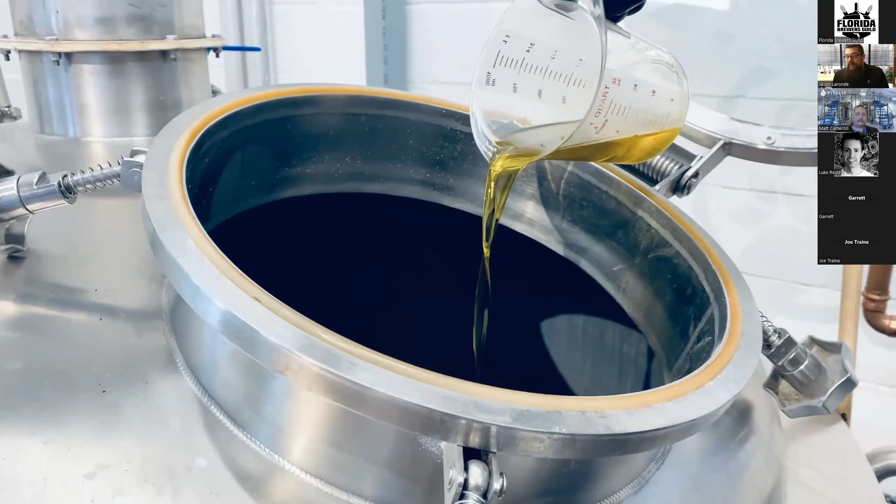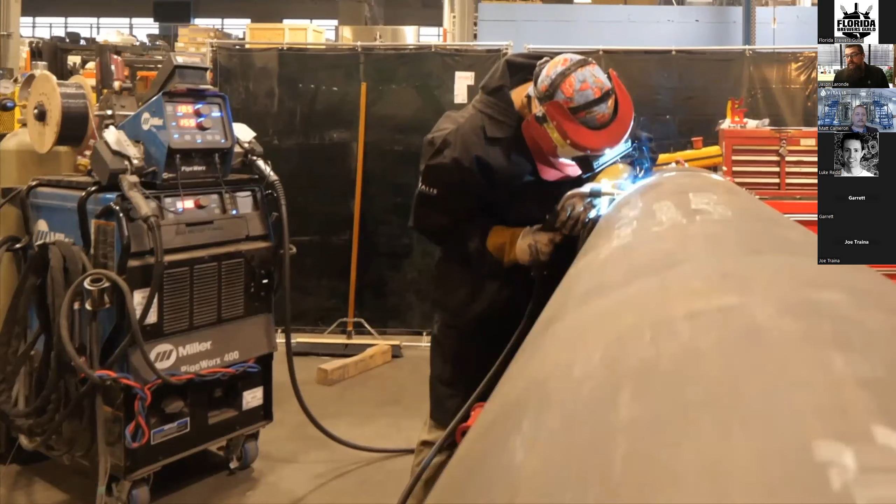So at Vitalis, we provide clean tech solutions for some really cool markets. Our experience with the beer industry actually goes back several years. It started with helping one of the world's largest hops extractors create specialty CO2 hops concentrates using our equipment. We are a vertically integrated original equipment manufacturer of CO2-based technologies with in-house R&D, design, engineering, production, and support. And our mission is to help producers thrive while becoming more resilient and future-proof.

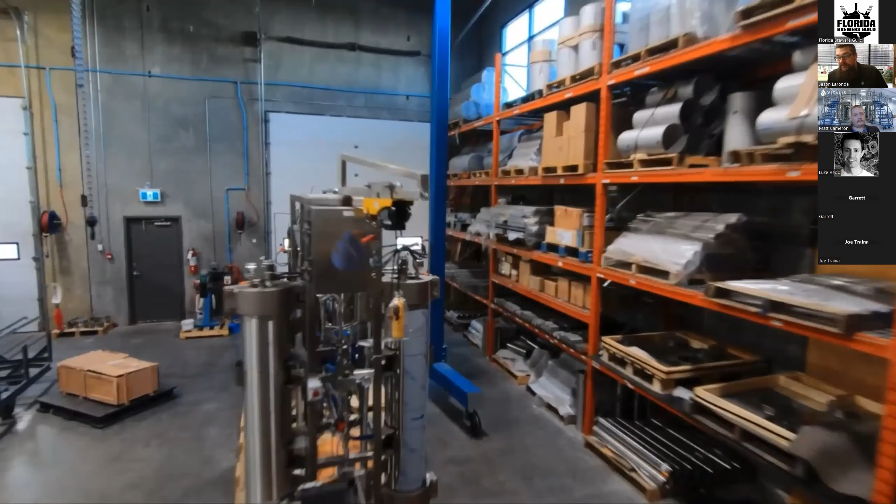We do that by utilizing the unique properties of carbon dioxide in a number of different ways, like extracting or refining natural ingredients from biomass, or employing CO2 as a heat transfer fluid and a natural refrigerant, or recovering and distilling CO2 for repeated use, which is what we're going to talk to you all about today. We have over 150 installations on 5 continents, and our CO2 expertise is recognized worldwide.

As Jason mentioned, CO2 is a big part of our day-to-day in the brewery, and it's a key part of the operation. Probably something that we all just couldn't live without. So, when we're looking at usage in craft breweries, whether you're packaging, blanketing, purging, we all need CO2 in some shape or form. But we also know that unfortunately, CO2 is not free these days.

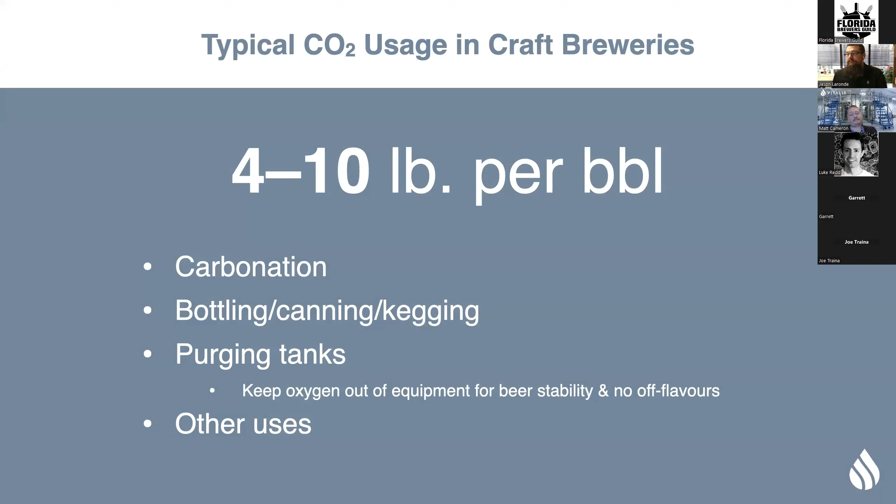So CO2 prices can vary dramatically from region to region, fluctuating with factors such as shipping distances or fuel prices, transportation shortages, and supply disruptions. And sometimes CO2 just isn't available at any price. CO2 prices have actually increased by 58.2% over the last 10 years, outstripping inflation by more than 2.5 times. So these are costs that you can't entirely pass on to your customer, and you need to absorb them as an increasing cost of doing business. We're curious, if you want to drop into the chat, tell us what your current rate is for buying CO2 by the pound.

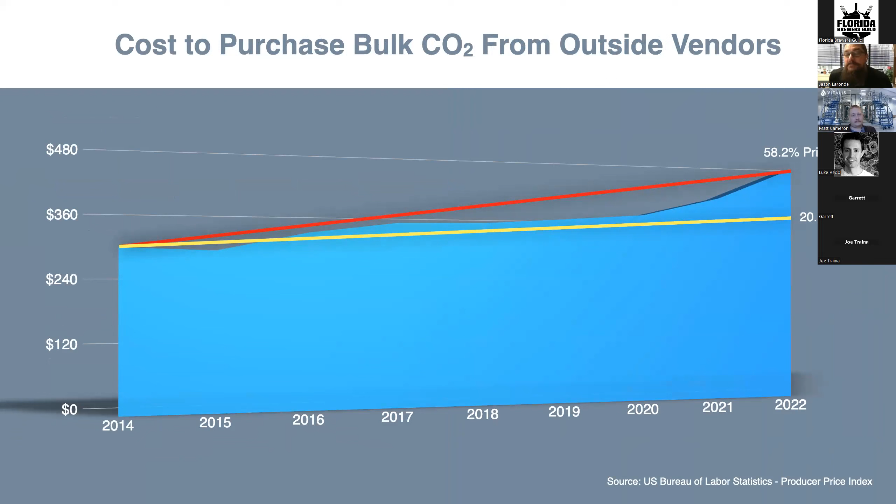Yeah, on top of the cost of CO2, supply origins is something that's nice to know in any food and beverage application where the product that you're making is ultimately being ingested by your customer. It's always really nice to know where that's coming from and how it's being produced, so that your customers can have peace of mind as to what they're putting in their body.

So typically, the CO2 you purchase in bulk from your supplier will be derived from things like oil and gas wells, possibly ammonia production for fertilizer, or ethanol production. So ethanol production, okay. Oil and gas wells, maybe not so much.

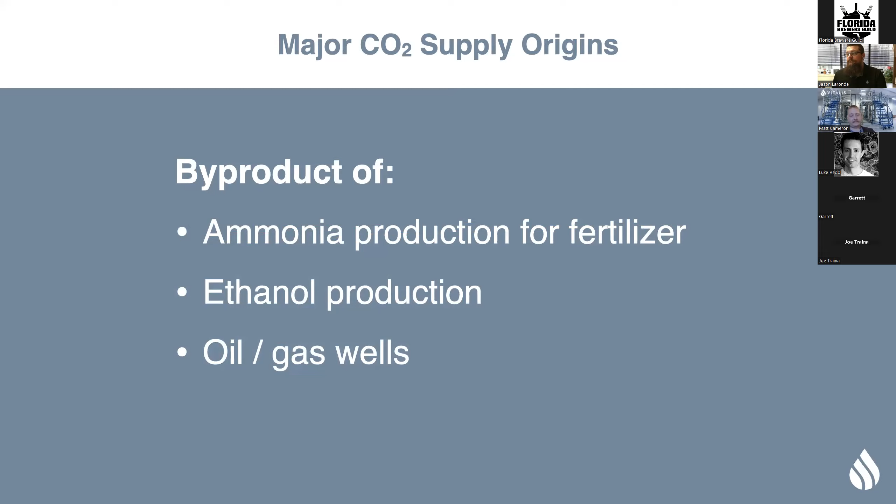As we've all seen, and we're probably all very familiar with, the production of CO2 from the various sources we just discussed can have some real world negative impacts. Whether it's plant maintenance or plants shutting down entirely, as we've seen in New Zealand. These can all result in supply chain disruptions, higher prices, or possibly even a nice little force majeure letter from your supplier, which is not what we really like to see.

One other interesting looming implication is this 45Q tax credit. I'm curious if you guys put in the chat how many of you are familiar with this, but it has the potential to change the landscape quite significantly with CO2 suppliers basically being incentivized to sequester their carbon as opposed to their normal channels of selling it to their customers. So I'd be interested to see how many people are familiar with that and what you guys have heard about the 45Q.

So basically, for all these reasons, we've all been frantically looking at ways that we can reduce or optimize our consumption in the brewery day to day, right? Spunding, maybe chaining your tank blowdowns together, scouring the brewery for potential leaks, just to make sure that you're capitalizing on every kilo or pound of CO2 that you're using. And there's also nitrogen for purging. I know this is a pretty familiar process for a lot of breweries that are looking to knock down their CO2 usage.

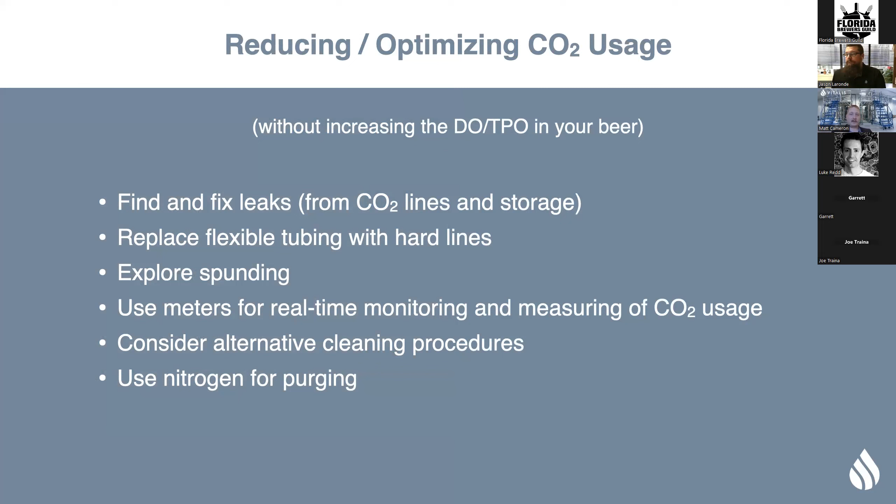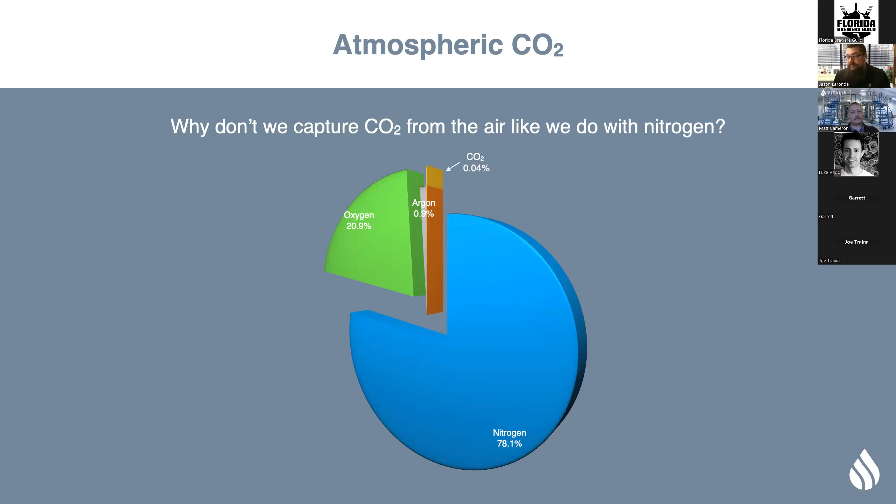There's, of course, the oxygen component of the atmosphere, which is what we need to live. Then there's argon, and then there's CO2. And CO2 makes up just 0.04% of the atmosphere. So it just makes economical capture impractical. Yeah, as Jason mentioned, there's not a lot to go around in the air.

So when we look at CO2 produced from fermentation, the numbers are much more favorable. As we all know, there's variables that affect overall production, higher alcohol content, how much you can capture on the front and back end, depending on what system you might be looking at. But either way, it has the potential to really be the great equalizer. The ratio of produced CO2 to consumed CO2 can be as high as 3-to-1 in any given brewery. So I'll let Jason maybe dive into some of the math on this.

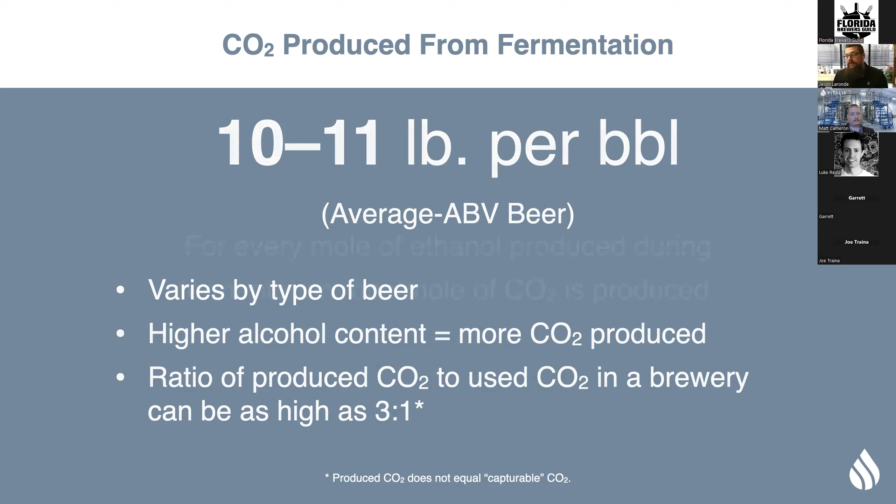Yeah, so CO2 capture is not a new technology, but often equipment is marketed as to how many barrels a piece of equipment might be appropriate for. So that's how you size equipment. But in actuality, it's more important for you to understand how much CO2 your brewery is actually producing, so that you can select the most appropriate piece of equipment to capture as much CO2 without overbuying or underbuying the capture equipment.

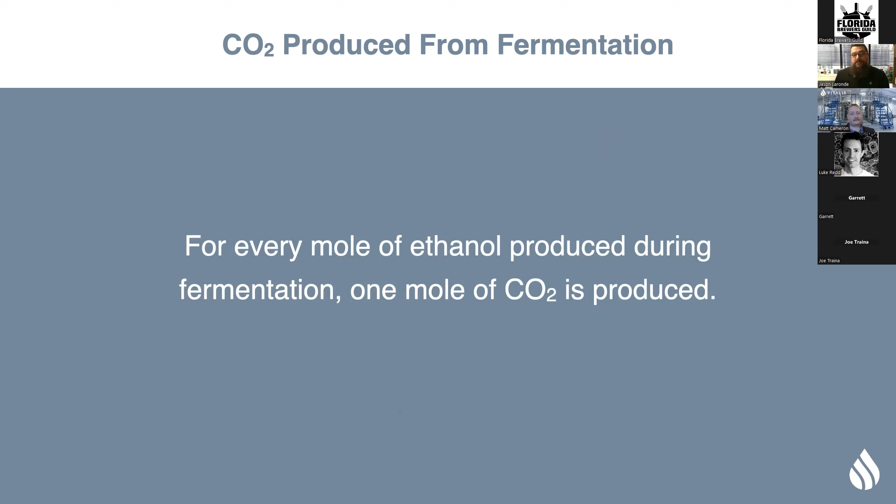So for every mole of ethanol, this is going to get really nerdy into the science, but mole being a unit of measure. For every mole of ethanol produced during fermentation, 1 mole of CO2 is produced. And so we can actually use this formula, which allows us to calculate how much CO2 is actually being produced by each individual brewery. We look at the volume of beer that a brewery is producing per year. We look at an overall ABV of the beer or the beers that brewery is producing. We multiply that by the density of ethanol, and then multiply that by the molar mass of CO2, and divide all of that by the molar mass of ethanol.

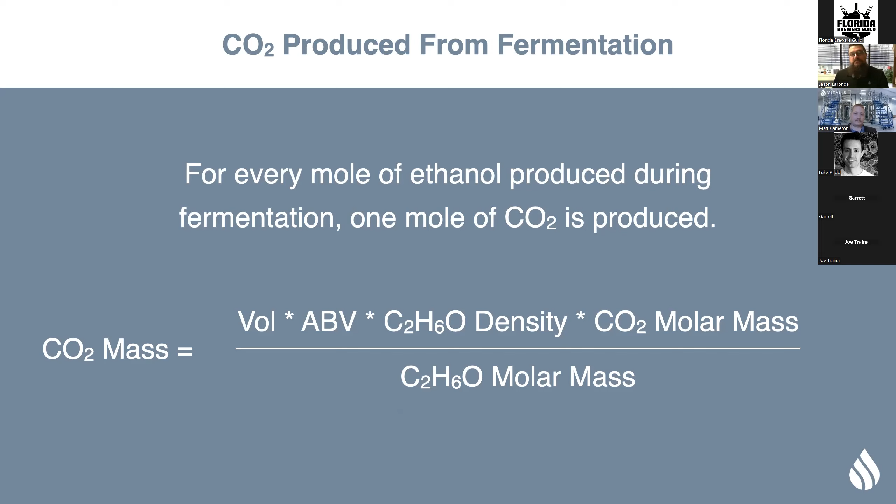And we can actually figure out how many kilos, how many pounds of CO2 a brewery will produce every single year. And so if we then plug that into a couple of case study models, we're able to actually show very definitively about how much CO2 you realistically could generate. And then when we compare that against what you pay for CO2, how much CO2 your brewery uses every year, we're able to actually figure out what an ROI model might look like when deploying CO2 capture equipment into your

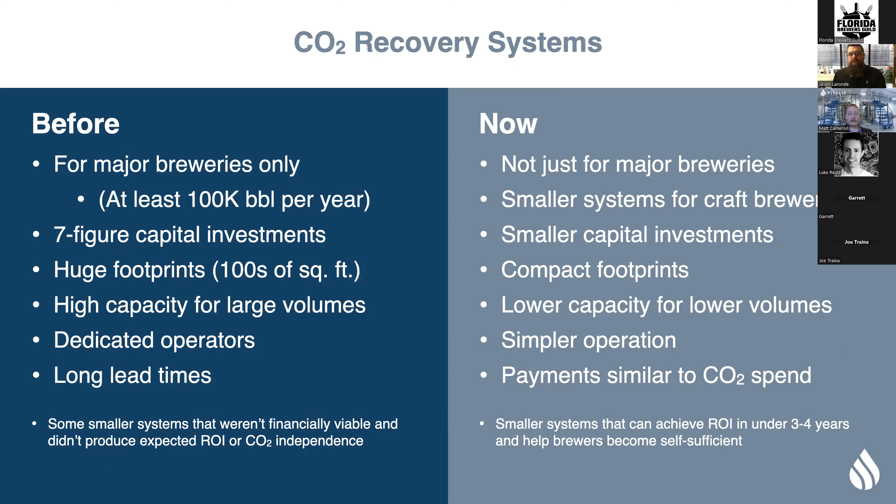So we've been able to develop this system to make it accessible for smaller breweries, right? Lower capacity throughput on the system. It doesn't have to churn at 1,000 kilograms per hour, because it's not realistic for the majority of the market. So it's really refreshing to see some manufacturers out there putting a lot of work and effort into making this kind of a potential reality for a lot of these breweries out there.

I mean, as we all know, the large percentage of the market is this 5,000 to 25,000 barrels per year. And so it's been really great to see this accessible for the craft brewers. As with anything, when you're looking to purchase equipment, or you're researching and understanding new technology, there's always variables to consider, because it's certainly not a one size fits all solution, right?

So, one thing you've got to consider is the volume of beer that you're producing and the amount of CO2 that you're using. As Jason showed in those case studies, it's a very different scenario based on, do you make RTDs? Is my CO2 consumption a lot higher than your average brewery? So it's important to look at the number side of things. How much beer am I making? How much CO2 am I using? And how much CO2 will I produce from fermentation? All those things go in that equation to work towards, does this make sense for me to implement, right?

Sometimes certain breweries will have really great rates with their suppliers for CO2. So, if you're paying 10 cents a pound for whatever reason, let me know if you are, because I'd like to talk to your sales guy. It might not have that same ROI calculation that Jason was showing. So all those variables are really important to look at. And then at the end of the day, that all equates to what ROI might be.

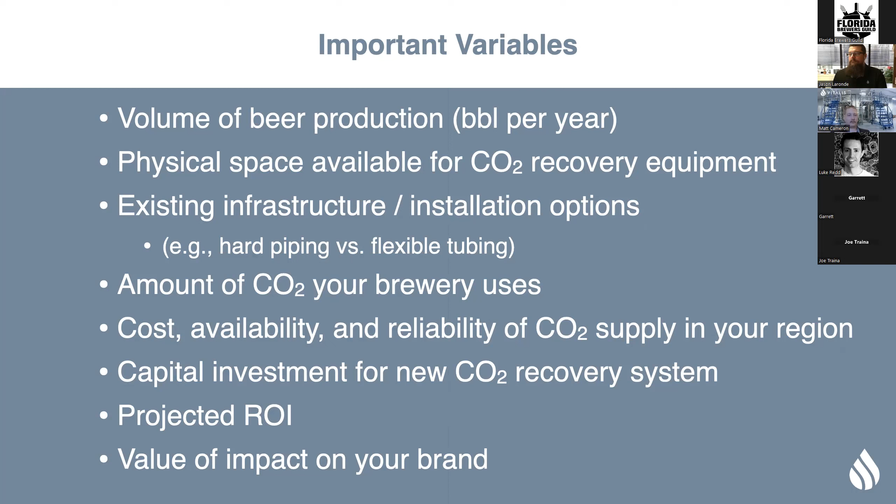But outside of the financial thing, it's also important to consider what the optics of that are on your brand, right? What the value of the impact is on your brand. It's something that everyone's talking more and more about, right? Sustainability, clean technology, and there seems to be a lot of respect in the market for breweries that take a step forward as innovators and look at new technology, and that pays dividends, because your loyal followers and customers are going to respect you for that, and as a result, they'll probably come into your taprooms more or buy more of your beer. So there's a lot to consider when looking at these systems.

Now, that's just considering the idea of CO2 recovery and how that will impact the brewery, but there's also factors to consider when you actually begin shopping, right? If you've decided this technology is the right move for your brewery, there's some more intimate key points to keep in mind while you're doing the research, right? So, what is the capacity of the system?

This is a really important one that we always look at: if you're brewing 10,000 barrels a year and you've found the system that fits you just right, is that going to be obsolete in 2 years because all of a sudden you've moved up to 15,000 or maybe 20,000 barrels? Maybe you had a really great couple of years. You put in a new row of fermenters or two, and all of a sudden your annual volume has doubled. Is that system going to be able to keep up with that capacity of beer?

Because it's not great to spend 100,000 or 200,000 on a system and then 2 years go by and all of a sudden it's not really pulling its weight anymore. So the throughput of the system compared to your current volume, but also your projected volume, is something very important to consider.

Maintenance and consumables, something very easy to overlook. I've got the system, it's operating, I love it, but what filters do I need to replace? Are those filters maybe a proprietary product from the manufacturer? That might equate to not being able to get them when you need them, right? And so now we go back to being limited by supply chain. So, I would say keep a close eye on what those consumables look like and what preventative maintenance looks like, so that you can keep the system on and running all the time so it can continue to do what it's designed to do.

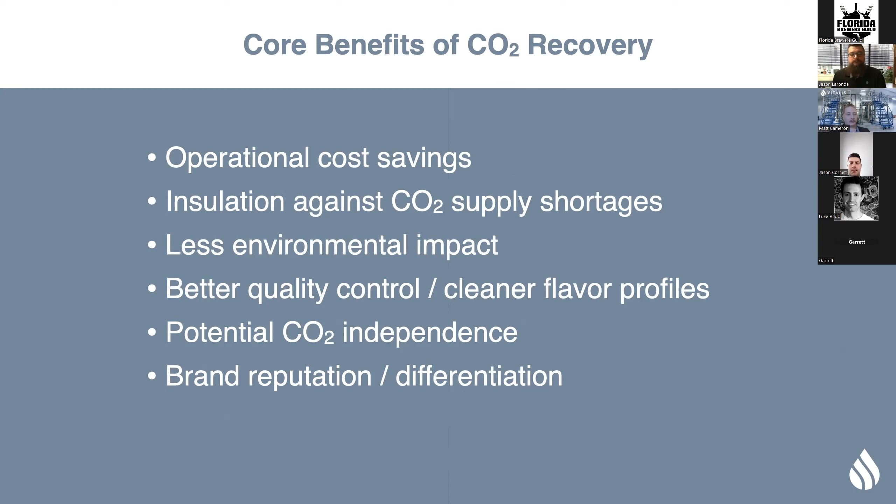There always needs to be social proof for people to adopt new technology, maybe step outside of the comfort zone. It's not easy being the pioneers of new things that not a lot of people are doing. So it has been going on for a long time, right? Big beer's been doing it, but then craft brewers start to get into it. We've got Alaska Brewing here that did this more out of necessity due to their geographical location. When you're living in Alaska and trucking your CO2 all that way and trucking your beer around, it really starts to add up. So these guys are a little bit ahead of the curve. 25 years ago, they jumped down the rabbit hole.

But thanks to pioneers like Alaska, this technology is becoming more accessible, but it's also spreading awareness because people can see this. The proof is in the pudding, right? The breweries are doing it. They're seeing the impacts it has on their business model, and people are following suit.

So how does it work? First of all, what we start with is the CO2 from your fermentation process, and in many cases also the CO2 recaptured from blanket gas and purging. We want to capture as much CO2 in your system and recycle it as we can. We then either use a small amount of capacity from the brewery's existing glycol system, or we can couple it with one of Vitalis's R744 CO2-based Coolshift heat pumps, if this is part of a new brewery or maybe a broader retrofit. And the CO2 recovery system encompasses these processes here.

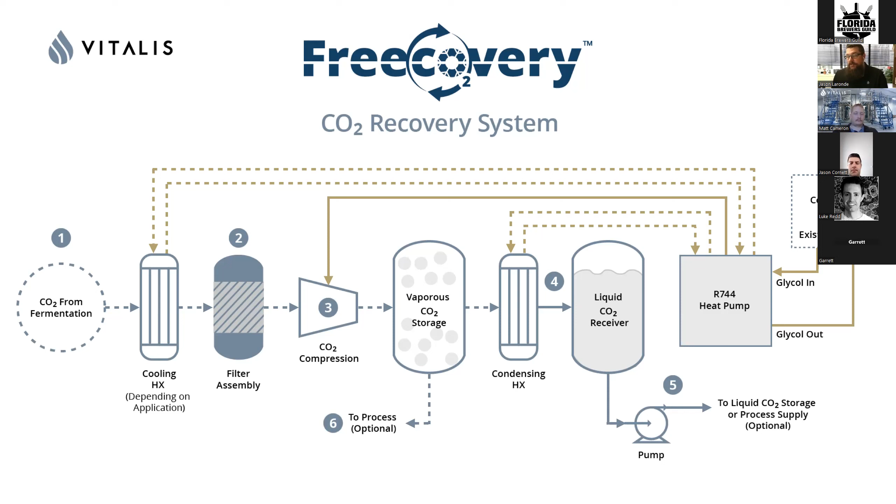There's no sense using all the additional energy to condense the CO2 to a liquid, only to then have to boil it back to a gas for processes like purging and blanket gas. This way we can plumb gas processes with gas and liquid to liquid processes with no wasted energy to convert phases twice unnecessarily.

This equipment can be installed directly in your cellar, possibly in a mechanical room nearby to the cellar, or even outdoors with an enclosure if the space just isn't there inside. If there's an adjacent wall close to the cellar, but it makes sense for this unit to be outside, then that's also a possibility as well. There could even be a scenario where it goes up on a mezzanine in the cellar in case that's how your particular brewery is laid out.

Speaking to the purity of the system, most of these systems will get a purity of around 99.99 plus. One key thing is the performance on dissolved oxygen. Yes, it's pure CO2 analytically, but that can be broken down in a myriad of ways, right? And one thing that I've always heard in the brewing industry, I've probably installed and commissioned 500 brew houses over the last 20 years, DO is always kind of creeping around and being a problem. So one of the things that we've focused on is a pure, clean CO2 with low dissolved oxygen.

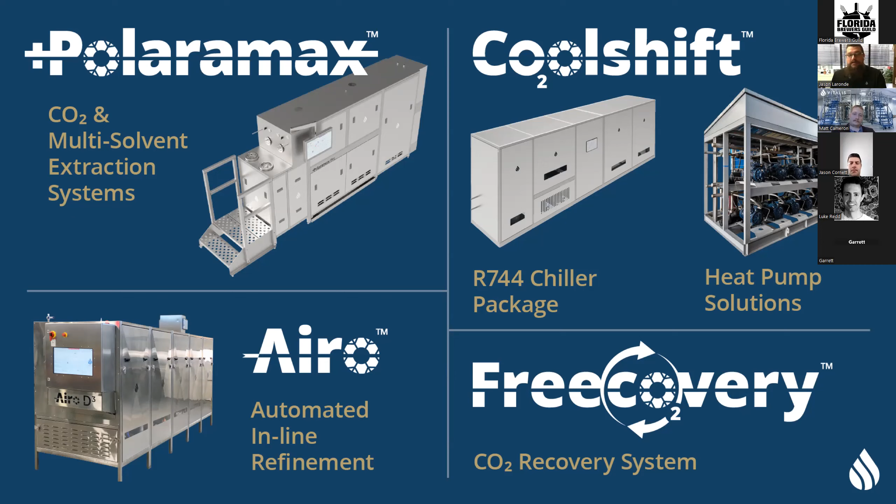So with that, I'll close with: Vitalis Freecovery CO2 capture system is the first commercially available CO2 recovery system designed specifically for mid-sized commercial craft breweries that can provide economically viable capture of CO2 to match your rate of production and allow you to approach or achieve CO2 independence.